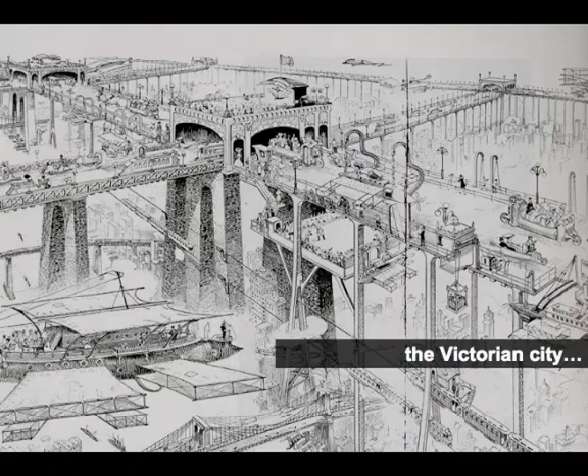The Victorians, when we look around us and our polluted environments, what we're doing to our atmosphere, the Victorians thought slightly more forwardly perhaps, and thought underground to create a slightly less deadly place for their inhabitants. This has been a real lesson in infrastructure, being the opportunity to make things happen in a better way, to reduce contamination and to improve the lot of the people above ground. We see lots of pictures of things above ground, but as an engineer, below ground also interests me.

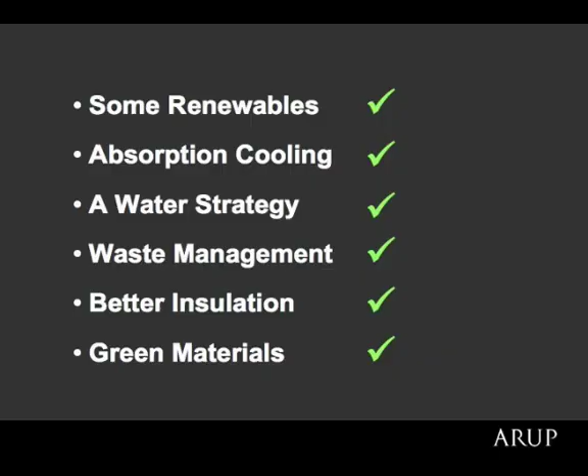Is that a future for us all? Is this a preeminent future we all want and we all desire? When we're looking at buildings in this context, and I see this as very much a contextual image, we have LEED and other excellent metrics for building greener. But really, when we're building greener, do we look for a tick list to achieve a LEED rating, or do we try and maximise the sustainability of any particular proposition? We see we might do some of these things, but really it's not good enough, looking to the future, what we need to do to mitigate this carbon.

So are we after green buildings or more sustainable development? It's a very big question. Sustainability, rather than green, contains a lot more stuff in it, particularly societal impacts, societal elements. These vary in different ways wherever you are in the world. Some are common - climate change, other issues and elements are common throughout the world. Others are more regional - water, for example, climate, microclimate - and then local, cultural. All have a reputational issue. For those of you who are interested in reputational issues, Gary Lawrence's talk tomorrow afternoon is what I strongly recommend in terms of addressing the ability and sustainability to contend with reputational issues.

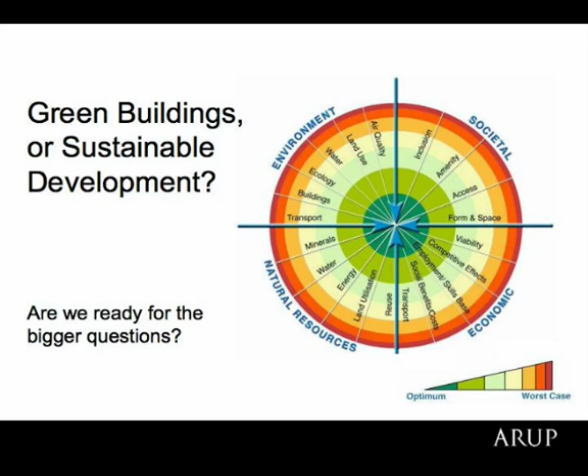But good questions for green buildings - I'll do the easy one, natural resources. This is a framework tool that we use in some of our projects in Arup. Within this can sit LEED, BREEAM, Green Star, other green metrics. This is a framework that helps our bigger urban projects to realise a bigger, broader agenda, as it were.

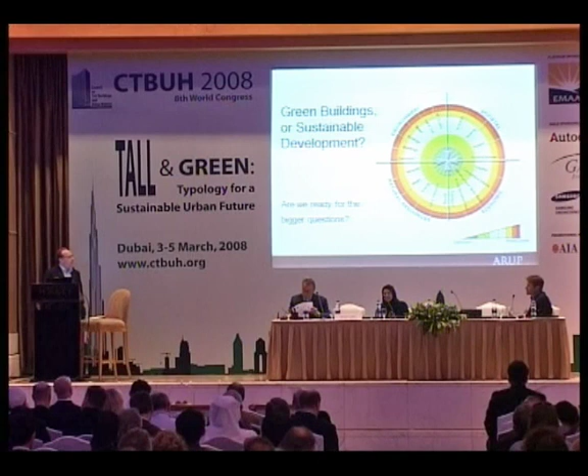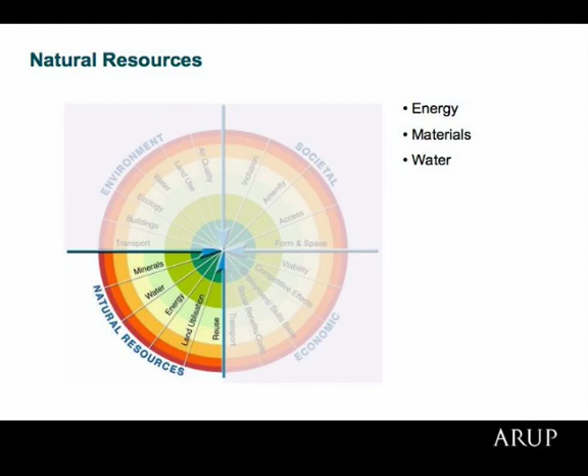It's very useful to categorise our impacts and our opportunities, as Alistair said, in a way where we have challenge and opportunity to do better. So natural resources is one part we look at. This conference is mostly about these topics, I think: energy, materials, waste, water - those topics which are specific to an individual element with threads moving out.

But of course, tall buildings, as I'll talk about in a minute, use more stuff per square metre than any other building type. They've got to have something else that makes them sustainable. A low-rise building, the Platinum building described in the previous presentation, is a low-rise building. Why would a high-rise be better? Why would it be greener?

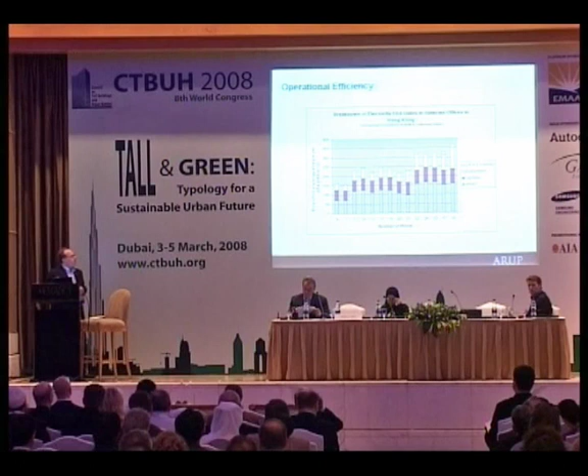It's all about density. So we look at energy consumption. These are Hong Kong high-rise buildings. The higher the building, the more energy per square metre it uses. We can mitigate this by techniques, a conventional approach.

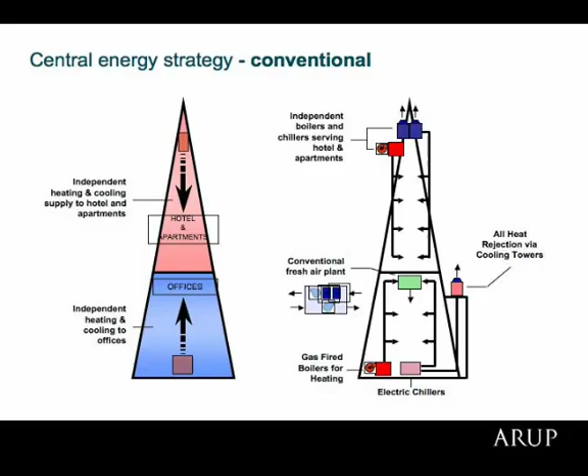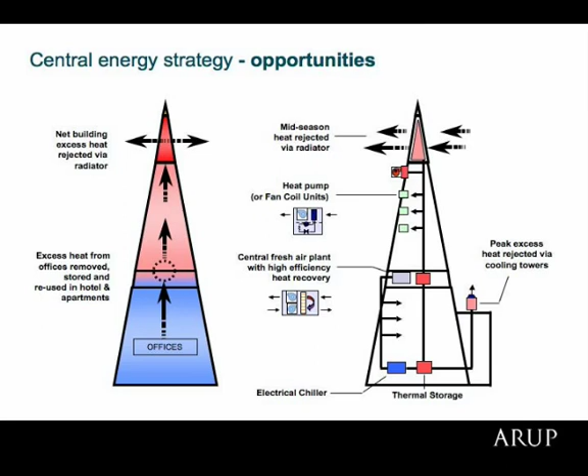With some high-rise buildings - this is the Shard in London - it has multiple uses within it, sometimes called a vertical city. One wonders how the social demographic would vary from top to bottom in these particular cases. Offices, hotels, residential - we can mix and match, we can share the energy, we can do all sorts of things with this to mitigate energy performance, and we should.

Combined heat and power, those sorts of mechanisms - energy that's liberated from air conditioning offices to heat or hot water for residences and hotels. These are opportunities we should harness within these mega structures, these very tall buildings.

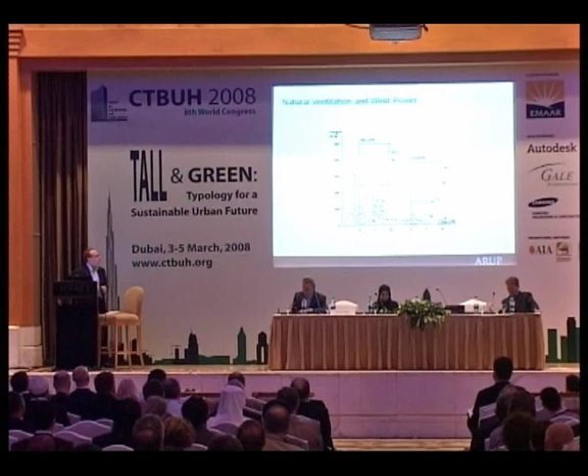Wind is another classic high-rise topic, whether it's for natural ventilation, the velocities we can manage at high altitude, or for wind generation. Again, a very favoured topic, as the previous talk in the next room was discussing.

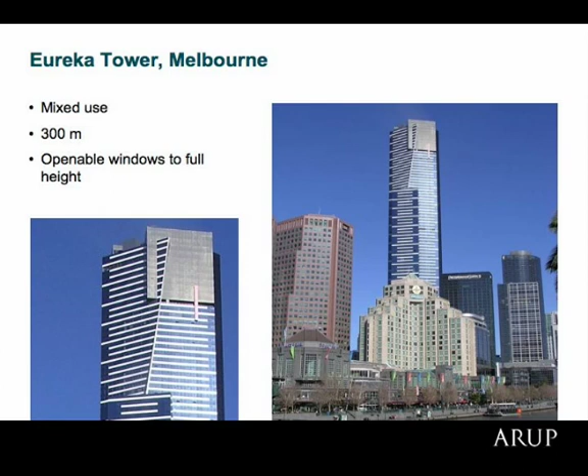We can actually ventilate buildings in Melbourne, in Sydney. This one's an interesting one, mainly air-conditioned I have to say - one I worked on many years ago - but has naturally ventilated rooms, offices, and meeting rooms. They seem to be successful in their functionality. So in a climate which is suitable, we can mitigate by natural ventilation.

In some climates, and this one, it's very difficult to naturally ventilate realistically - not just for the air temperature, but for the dust in the air as well. So again, it's a local solution to a particular problem or challenge.

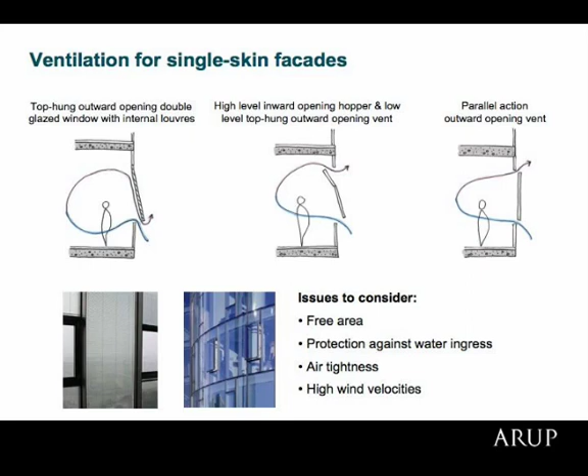And we can use quite well-tested techniques: naturally ventilating single pane, single layer constructions, double layer constructions. And these techniques - the higher you go, the more important it is to buffer wind effects and natural ventilation.

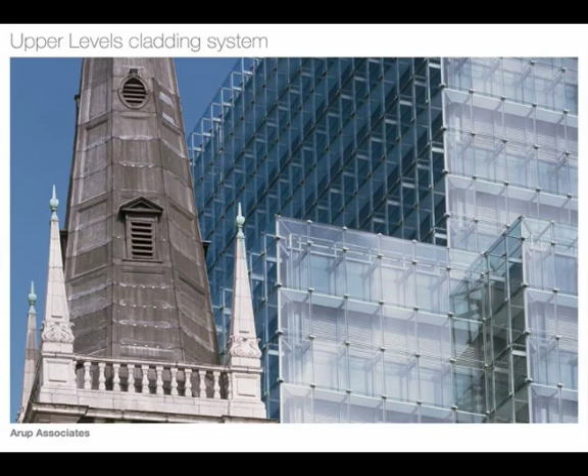A building in London, not particularly high-rise, but addressing these issues. It looks very glassy, but only has 40% glass, a vision panel within it. So again, there's an aesthetic which is glassy, but the heat flux through the window is reduced significantly by having more solid, frankly.

It's not that difficult architecture to deal with. It is difficult when you have a bright external environment and all glass - all the blinds go down, the lights go on, your energy consumption is severely damaged. And the technologies are well proven.

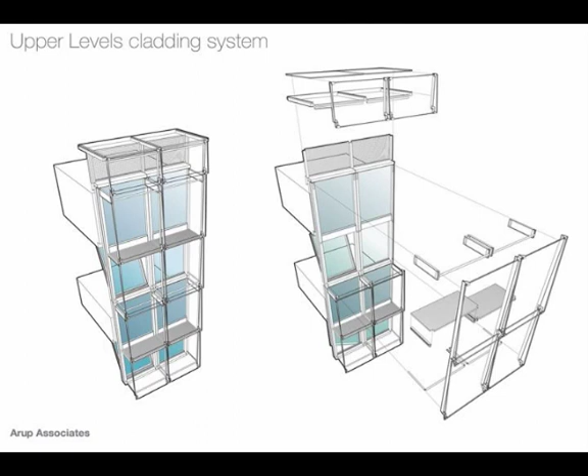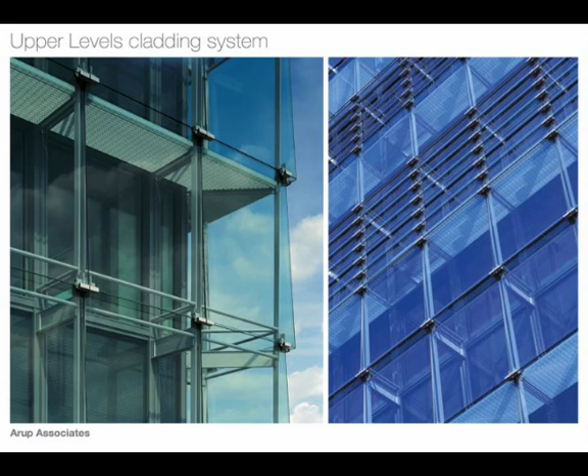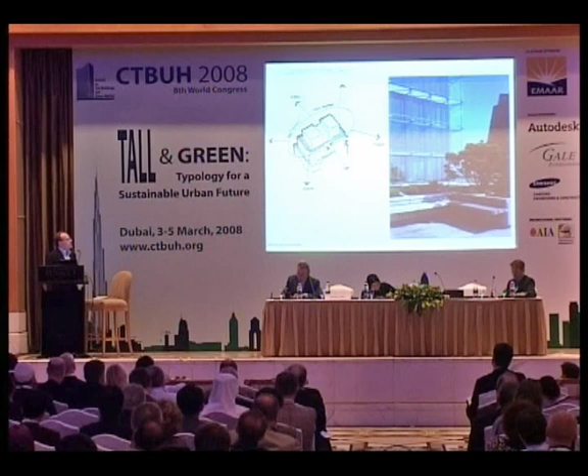And of course, gardens in the sky - a very common thing now, and of high value to occupants. Financially as well - this building, there was actually a bidding war for the floor that accessed this greenery, commanding the highest rent in the building for that one floor with access to greenery. So again, this thing about value is real.

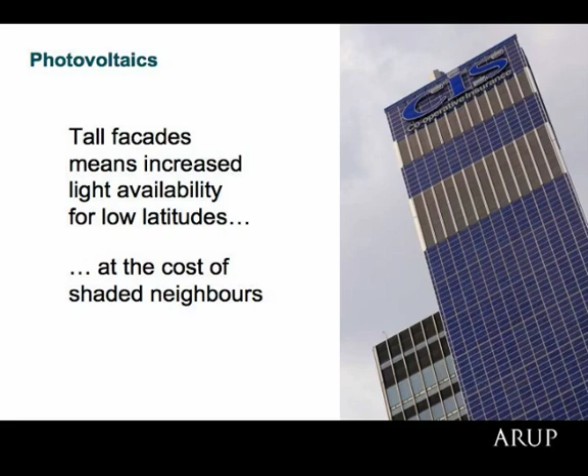Now, facades are talked about as a PV opportunity, and that's true for the latitudes further north. Of course, the higher the sun in the sky, the less valid they are. But as you shade buildings in high latitudes, more overshading happens. In a real case of this, these two buildings - the one on the right shadows the one on the left - eliminated the potential for any PV on the facades that the design team were keen to implement.

The only bit we could put on the roof of the left-hand building. These are real concerns when we develop high-rise very densely. The dream of energy production on buildings becomes anathema, becomes a nonsense in reality. But we can do a lot to reduce energy consumption of buildings.

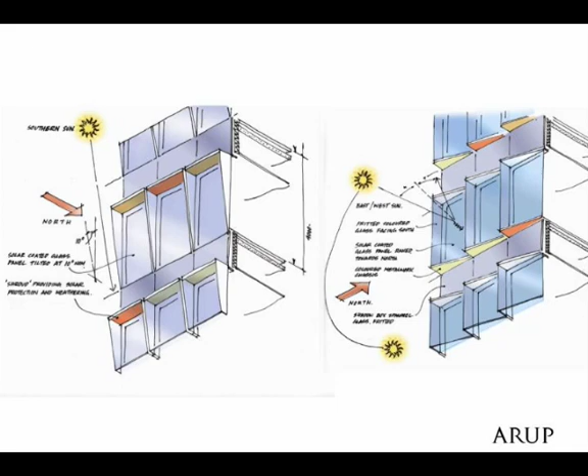This is another building that uses tilted glass to turn away from the sun. Again, it's not 100% glass, so the vision panel with the external cladding is actually fully glass. We tilt the windows away and we save 20% of the carbon emissions that the perimeter office would emit through just that one move of tilting glass away from the sun. Again, the higher the sun in the sky, the more effective this can be for self-shading the buildings.

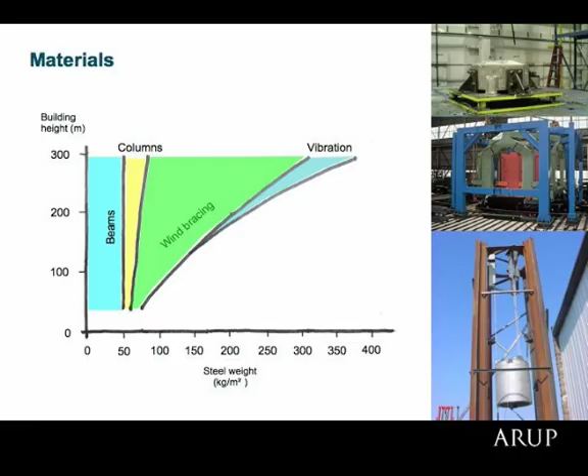Material use, again, part of the sustainability debate. We get taller, we get wind bracing. When we get taller, we put wind turbines on as big sails to catch the wind, which of course put enormous forces on the structure. So the green wind bracing bit goes up.

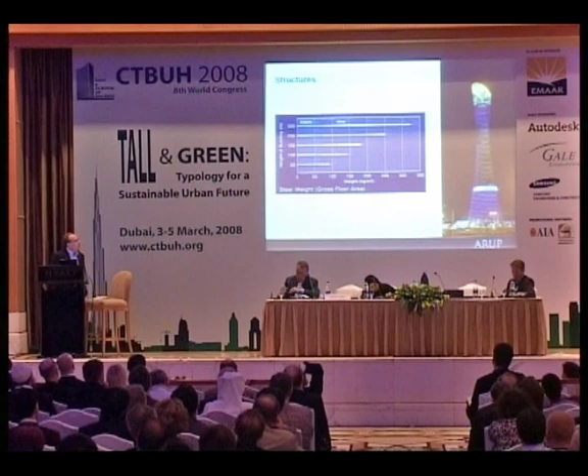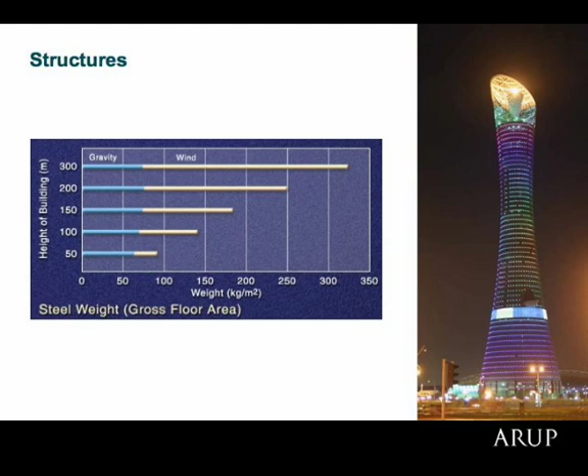Certainly in terms of when we address renewables on buildings, I think it needs to be realistic in how we deal with them. And the steel weight with a high-rise building goes up and up. The gravity is the blue, the wind force is the yellow, and again the higher you go, the more wind force you get, the more opportunity for generation. But is it real? What's the real answer?

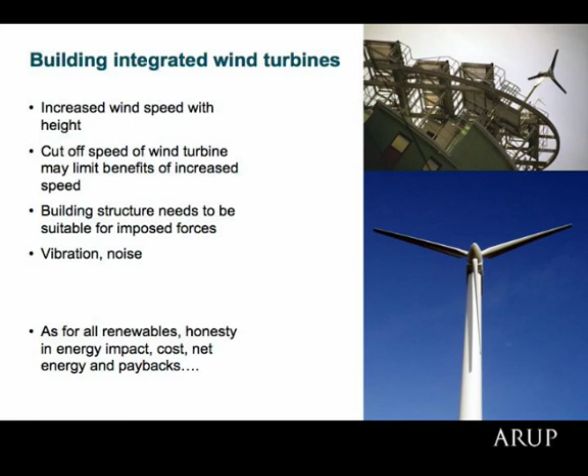So really, I implore honesty in the industry for the real energy savings we have from renewables by putting wind turbines on tall buildings. When you brace them to take the loads, when you've isolated the vibration, when you caught all the wind you can, how much do you really get? And how long is the payback period of energy that you would otherwise save?

We hear stories of people saying that, oh, this building will be carbon neutral because of its power generation. But in the end, it may produce 3 or 4% of the building's energy. Is that good value when there's more at stake than bolting something on a building?

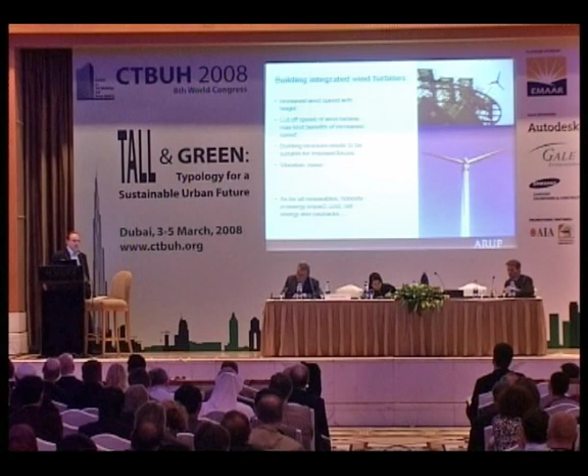We did it for a low-rise building, and even a low-rise building, we took the turbines off and put them on masts because of the impact on cost and structure for putting them on the building. That's a low-rise building without the inherent overburden of wind pressure tall buildings have.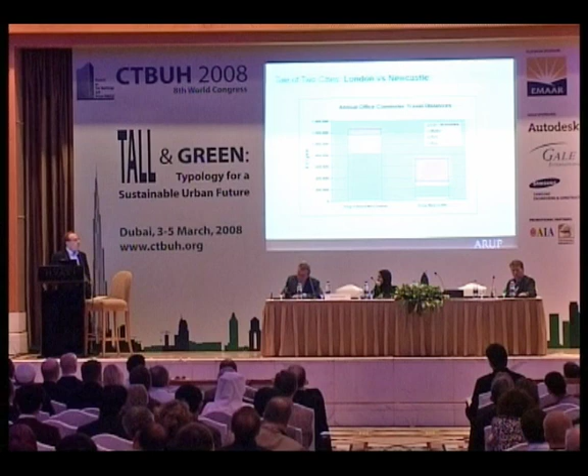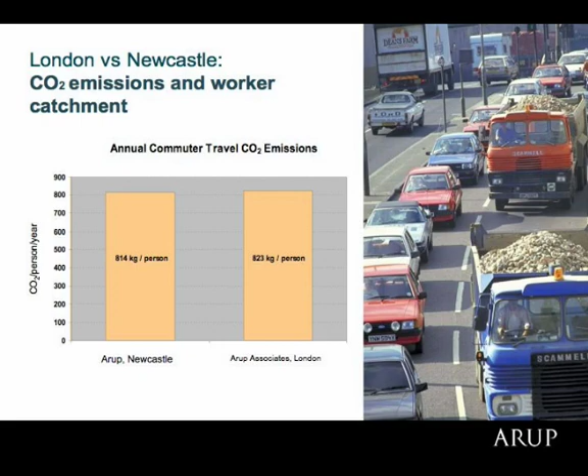And yet, when we analyse the carbon footprint of those, bearing in mind that London commuters come from an awful long way away compared to a regional office, the carbon impacts are about the same. So there's a little bit of a fallacy here about how far you travel into work and your mode of transport and the carbon impact, the carbon efficacy of that particular mode of transport. So again, where you are, what kind of city you are, will have an impact on the overall carbon footprint.

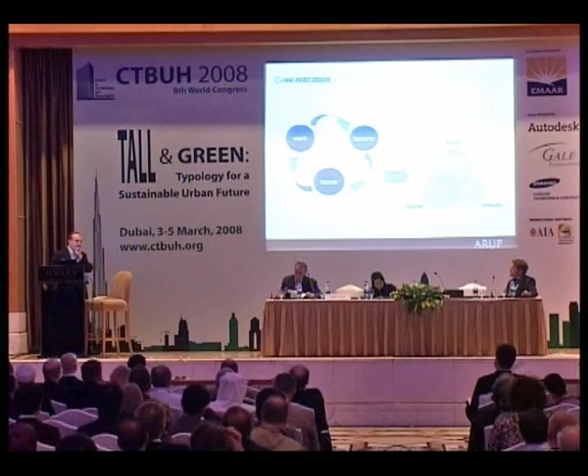The concentration that Peter mentioned this morning of cities, the diversity, the vitality. If there isn't diversity and vitality very locally, then all this is for nothing. The carbon impact will not change from a regional or sub-regional model.

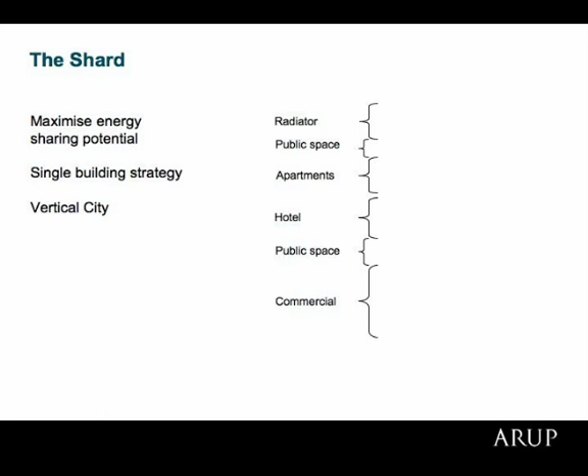And again, we look at vertical cities, but how real is the movement between the commercial space and the public space within that building. And these are some plots that the UK government published on different modes of transport.

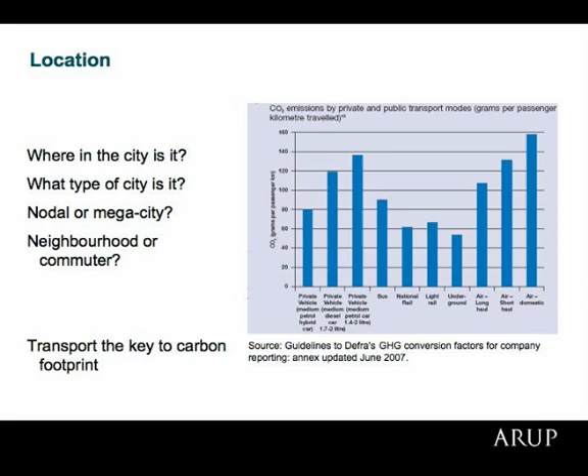On the left it's actually in carbon per kilometre. So left-hand side is personal transport and the railways in the middle, but they're not that different. It's only 2 or 3 times difference. There isn't 10, 15 times, sometimes the sense of the communication would have us believe. So again, some realism in terms of commuting.

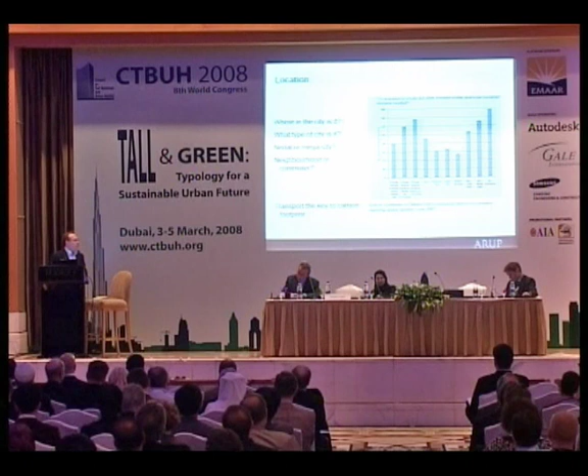Whether it's a mega city where people commute for miles, tens or twenties of miles to work, or whether it's a neighbourhood or nodal city with many nodes around a central point. This is driving some of our city urban designers to think about multi-centre cities rather than a single mega city where people travel great distances to work, worsening the overall carbon footprint.

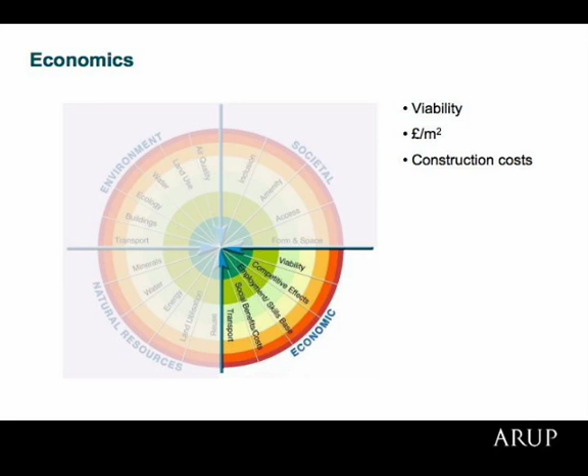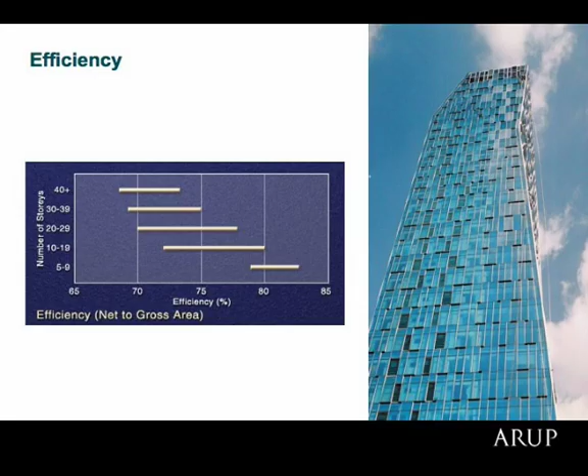Economics is not my speciality topic, efficiency is. When we talk about design and making high-rise more efficient, lifts come into the equation as a structure, along with different techniques to reduce the amount of area. Yet we still see efficiency getting worse the higher we go, although it tends to stabilise at about 30 stories, similar to where the sky lobby is going. But efficiency is not why you build high-rise.

And lastly, the societal issues - inclusion, those are the issues. The inclusion one particularly is important for construction as well as for occupancy and the community. It's a reputational issue in different parts of the world for construction labour, and how we build our buildings as well as how we occupy them and their societal benefit for the community.

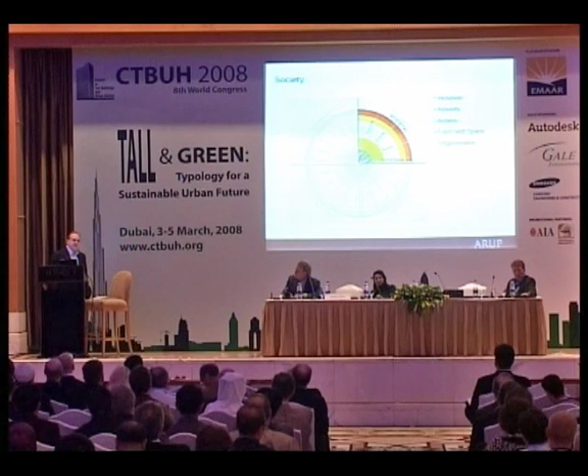So to think, why are we going upwards? Is it cost effective? Only when land values are high. Is it saving the planet? It's not implicit unless you make it viable for where the building is.

But is it about society? Is it about social inclusion? Again, it's not self-evident that we are not building elitist buildings, dare I use the phrase, or buildings that are not suitable or friendly to the society within which they reside.

I noticed on the Chicago tour, many of the buildings that people enjoyed being around were short buildings, not tall ones. And in the Windy City, as Chicago is called, the microclimate around the tall towers can be extremely hostile. Is it to be the peacock, the icon, a regenerating symbol? Very powerful, very important, not to be underplayed.

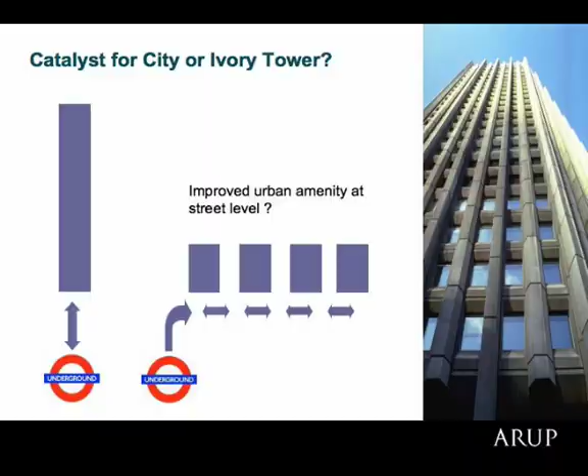But what is the real reason why we push upwards? Is it a catalyst for the city, or is it an ivory tower? Do we take our tube to work, stay in our building, and go home to our obviously hideous suburbia? Or do we stay in the city, moving around it as part of our society, our culture and community? That remains, I think, unproven.

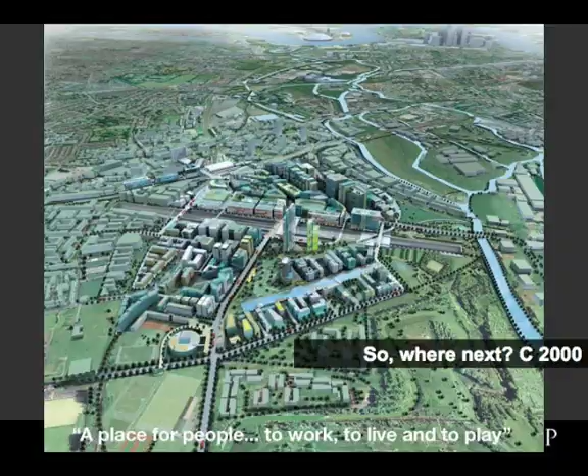There are some questions there. When we master plan for large areas, we tend to have tall buildings in small areas. This is a new regeneration in London called Stratford City - the Olympics will partly be there in 2012. On that site, high density near a big transport node, the main rail to mainland Europe, concentrates around a node. There are a few tall buildings with a very high intensity of occupation, but generally around it you'd call it medium rise - 10, 15, maybe even 20 stories.

High concentration, high diversity, and many activities within that close locale, so people can enjoy their life in the city, live there, work there, and play there as well. So again, using many models.

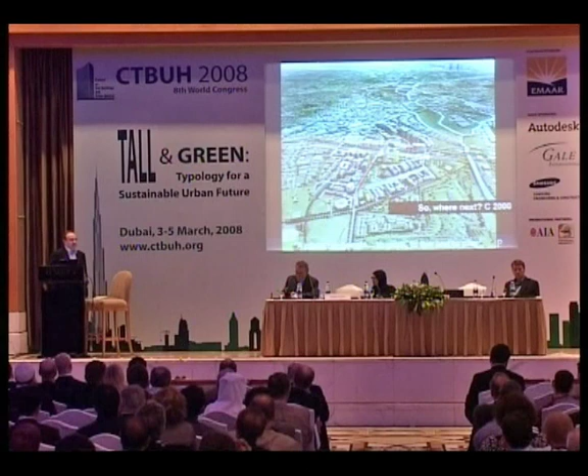When we have got a fresh slate, this is what we do. When we haven't got a fresh slate, when we have a plot of high value in a city, how do we resist the temptation, if it is inappropriate, to put up a big tall building? It's a very difficult conundrum, but we need to engage the difficult questions.

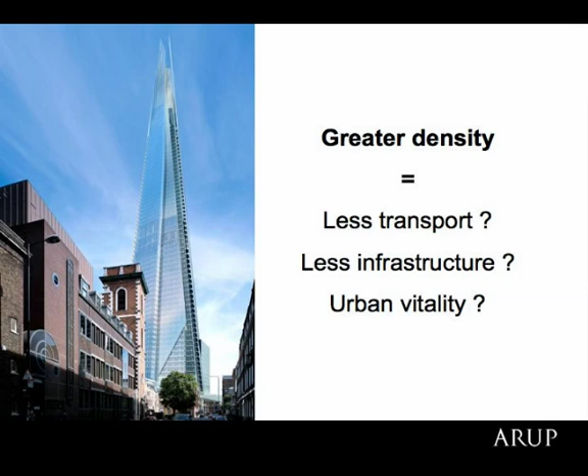So we've got greater density - is it with less transport? Maybe. Less infrastructure? I'm not sure. Urban vitality? Well, maybe. So I summarise, I suppose, with a series of questions: that where tall buildings are placed in the right place for vitality, in the right way with environmental governance, so their overall footprint is reduced, and connected to people, not seeking to do something elitist or separatist in terms of the cultural diversity of the city - then they can be sustainable from the ground up.